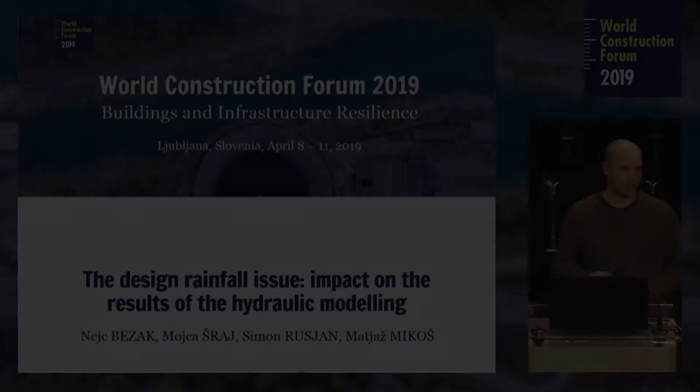I come from University of Ljubljana, and together with my co-authors I have prepared a contribution where I will talk about the impact of the design rainfall on the hydraulic modeling results.

First, a few words about problems related to design discharge definition. In case of ungauged catchments, where we don't have discharge data available, different procedures can be used for design hydrograph definition and design peak discharge calculations. In case of gauged catchments, where we do have discharge data, the procedure is relatively straightforward: we construct a flood frequency analysis to define the relationship between design discharge and return period. However, in ungauged catchments, different procedures must be used.

Often empirical equations are used. The problem is that these equations often have parameters that must be defined based on expert knowledge, which introduces a great level of subjectivity and uncertainty into these estimations. Another approach is using hydrological modeling, which is what I will talk about today.

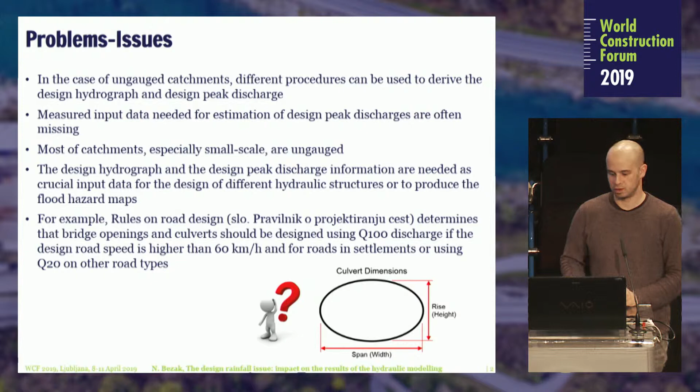As an example, rules on road design in Slovenia, the Pravilnik o projektiranju cest, determine that bridge openings should be designed using discharge with a 100-year return period if the design road has a design speed higher than 60 kilometers per hour, and for roads in settlements, or using a 20-year return period discharge for other road types.

As I mentioned, I will talk about the impact of design rainfall definition. Design rainfall is basically composed of the rainfall duration and the internal or temporal rainfall distribution, meaning the distribution of rainfall within the event. So I will discuss the impact of design rainfall on hydraulic modeling results.

We selected a small catchment area named Glinščica stream, located near the city of Ljubljana, where we are today, as a case study, and we investigated 10 different rainfall scenarios for the 10 and 100 year return periods.

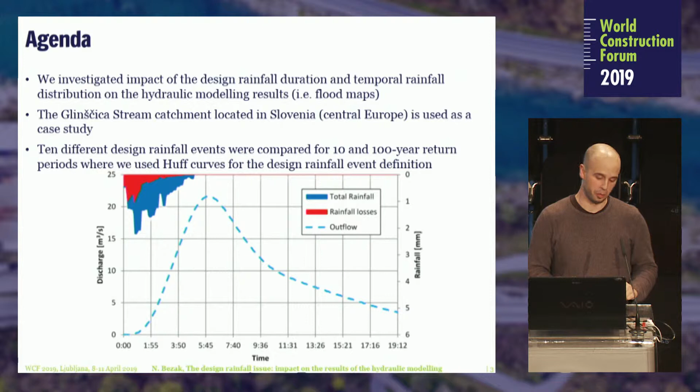A short description of this selected area: the Glinščica river catchment covers around 17 square kilometers. It drains into the Gradaščica river, which drains into the Ljubljanica river, which goes to the Sava river, part of the Danube river catchment.

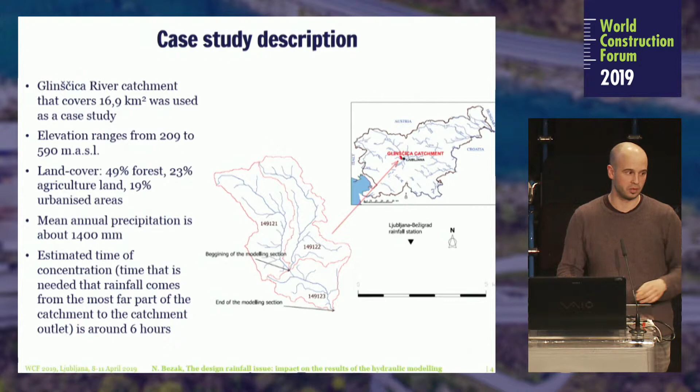Elevation ranges from about 200 to 600 meters above sea level. The dominant land cover is forest, followed by agriculture and urbanized areas. Since we are near Ljubljana, mean annual precipitation is around 1,400 millimeters, and the estimated time of concentration is about 6 hours. Time of concentration is the time needed for rainfall water to travel from the most distant part of the catchment to the catchment outlet, which in our case is this point.

To investigate the impact of design rainfall on hydraulic modeling results, we first had to perform hydrological modeling. For this purpose, we used the HEC-HMS model, which is freely available and was developed by the US Army Corps of Engineers.

Model calibration and validation were performed using discharge measurements, and we divided the entire catchment into 3 sub-catchments, shown here, along with the model structure. As input rainfall station, we used the Ljubljana Bežigrad rainfall station, indicated here on the map, and for design rainfall we used 3 different methods, which I will describe in more detail later.

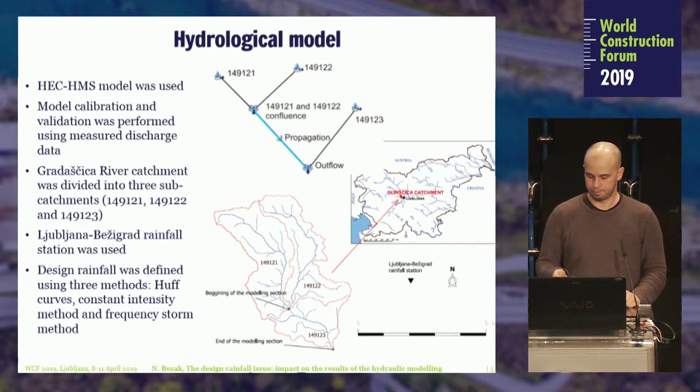A few words about the hydraulic model we used: we used the model from the same company, HEC-RAS. Modeling was performed only on one of the 3 sub-catchments, the last one, shown here.

We used combined 1D-2D modeling, where 2D modeling was carried out on the floodplain areas, and the connection between 1D and 2D areas was made using a lateral structure, one of the options for connecting 1D and 2D areas in HEC-RAS. Here are some characteristics of the hydraulic model we used: we used geodetically measured cross sections for the main channel, and LIDAR data for the floodplain areas.

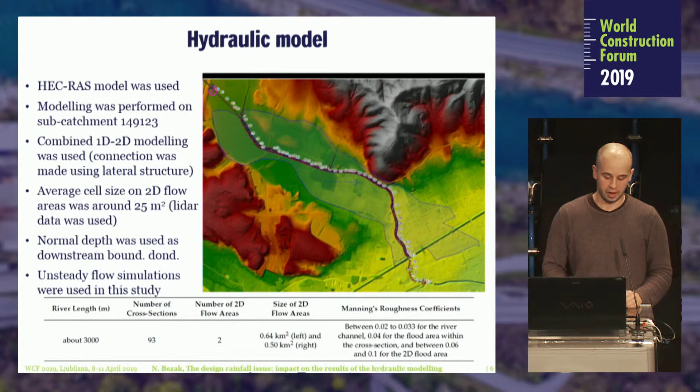Design rainfall: we used 10 scenarios.

6 of them were connected with Huff curves. I will describe these Huff curves on the next slide.

So we used 3 scenarios that were using a rainfall duration of 6 hours. This is the same as the catchment time of concentration, because this is like a rule: how should one define the design rainfall duration in case of ungauged catchments? So that rainfall duration should equal the catchment time of concentration. And we used 50 percentile, 10 percentile, and 90 percentile curves.

And we also tested shorter rainfall durations, so this is 2 hours, and 2 longer rainfall durations, namely 12 and 24 hours.

We also used a scenario where the rainfall intensity was constant within the rainfall event. This is one scenario that is not very likely to occur in nature. And we also used the frequency storm method. This is like the most extreme of the 3 selected methods, where we had 3 different positions of peak rainfall.

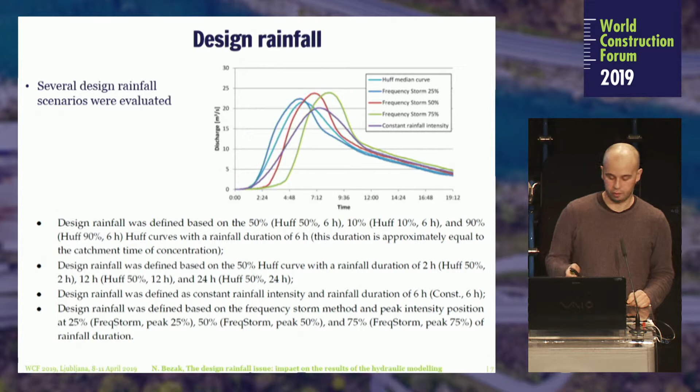So Huff curves were derived based on the analysis of past actual measured rainfall data. Firstly, we selected about 15 years of rainfall measurements at different stations in Slovenia. We then divided all these rainfall events into rainfall durations, from shorter to mid duration events and so on. And for different durations, we analyzed all the rainfall events that occurred in this selected time period.

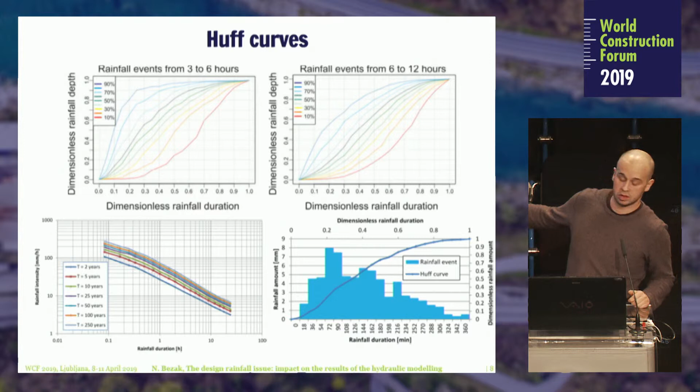So what we have for different stations, about 20 stations in Slovenia, are different Huff curves for different rainfall durations. In order to derive the design rainfall, shown in this bar plot figure, we need to combine the Huff curves with the intensity-duration-frequency curves shown here. So we need to multiply the rainfall amount with the dimensionless rainfall depth, and multiply the rainfall duration with the dimensionless rainfall duration.

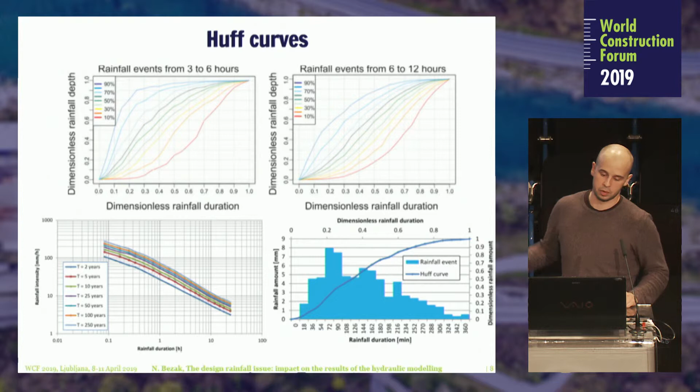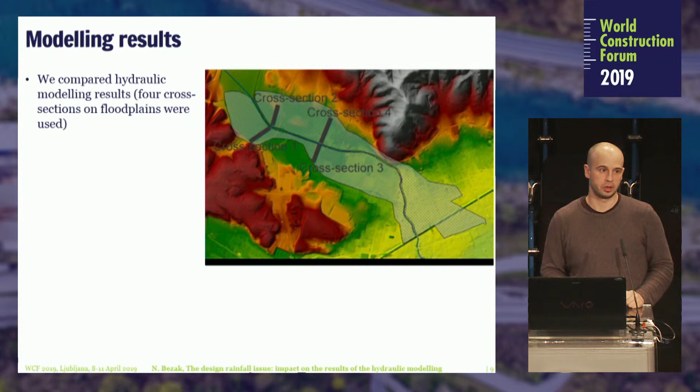So what we compared were water velocities and volume of water flowing through 4 cross sections located on the floodplain areas, on the right and on the left side. These are shown here. And we also compared the maximum floodwater extent for these 10 different scenarios.

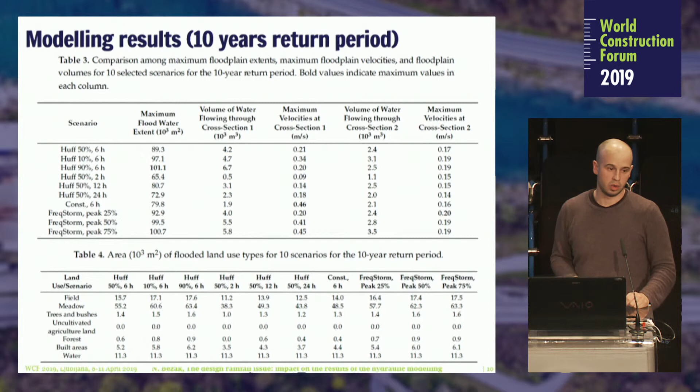Similarly, or even larger, differences exist in volume of water flowing through different cross sections, for cross section 1, for cross section 2, and also for maximum water velocities at different cross sections.

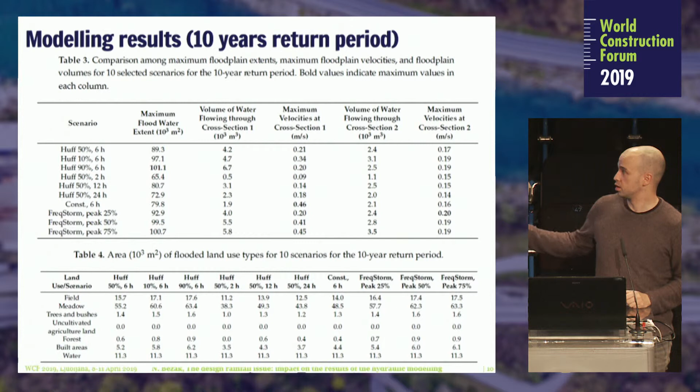We also investigated what is the percentage of flooded land use types in the selected case study, and these are the results for the 10 years return period.

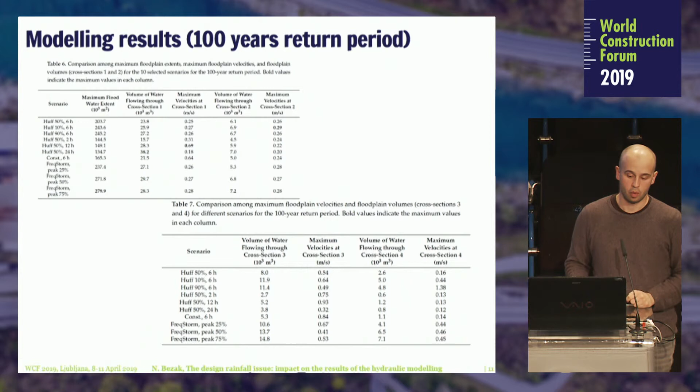Similarly as for the 10 years return period, differences are large, or a bit larger than expected, because the peak discharge values are even higher.

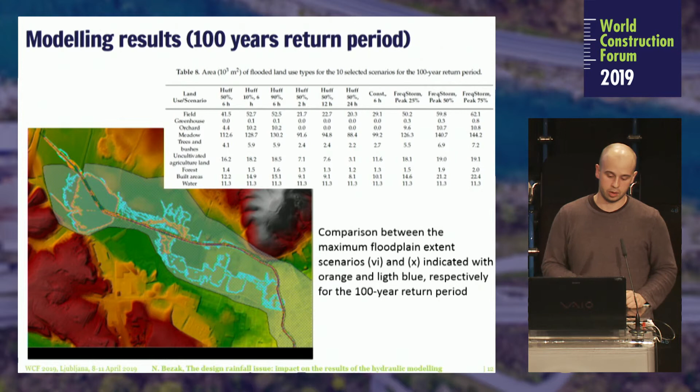And here is an example, a comparison between the flood water extent for scenario number 6, the scenario with the longest rainfall duration, 24 hours, for the 50 percentile Huff curve, shown as the orange line. The light blue is scenario number 10, the frequency storm method, which also yields maximum water velocities.

To conclude, we evaluated the impact of design rainfall on the hydraulic modeling results, using different methods to define the design rainfall: Huff curves, constant rainfall intensity method, and frequency storm method.

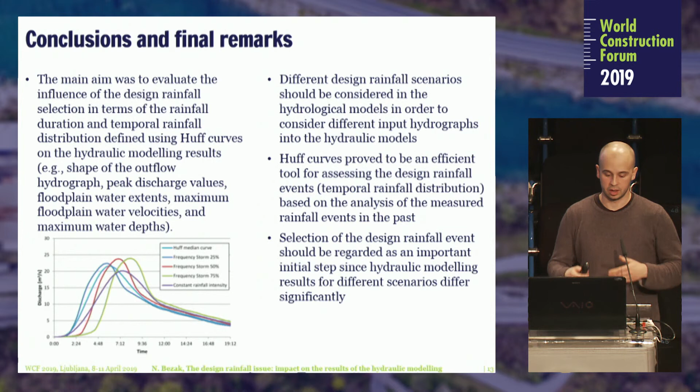Huff curves proved to be an efficient tool for assessing the design rainfall because they are based on the analysis of past measured rainfall events. We note that selection of the design rainfall should be regarded as an important step in the hydraulic modeling procedure, because, as we saw, for the 10 selected scenarios, the maximum peak discharge values were

1.4 times larger than the minimum peak discharge values. At the same time, the maximum floodplain extent was 2 times larger than the minimum flood extent, and the maximum floodplain water velocities were even 10 times larger than the minimum floodplain velocities.

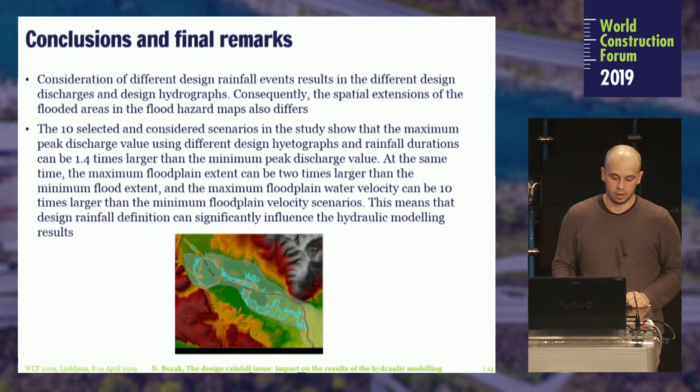This means that even small changes or small differences in the peak discharge value can result in relatively large differences in floodplain water velocities, for example.

So at the end, a final statement: rainfall characterization is crucial for credible assessment of the input data for designing hydraulic structures on small streams.